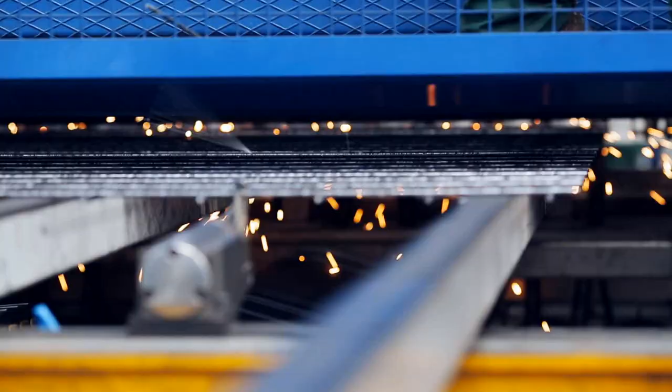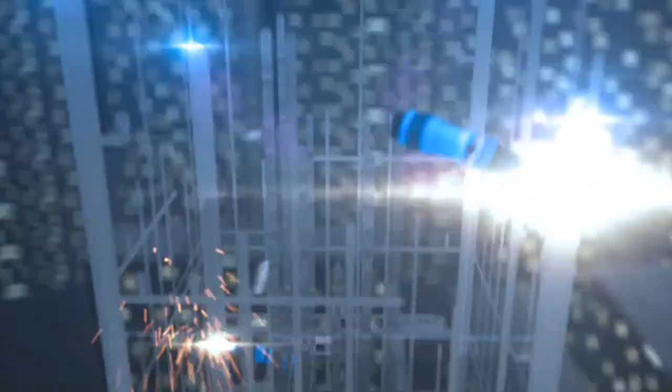A name engraved with the style and features of the era, an entity experiencing furious business battles, an enterprise bearing the mission of steel mesh industrialization. Jiaoyang Welder, in this ever-changing battlefield, gets stronger and stronger. Despite frustrations in the way ahead, it is stepping forward all the way.

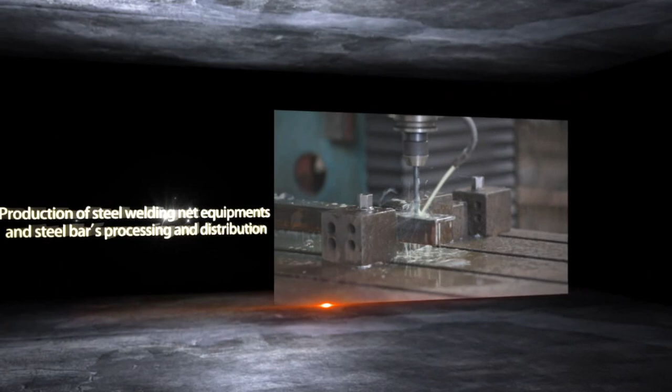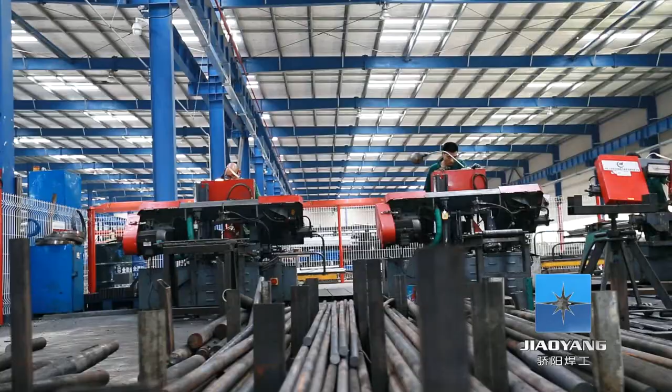Jiaoyang, located in the civilized wire mesh hometown Anping, China, was established in 1988. Devoted to wire mesh welding equipment manufacturing and steel processing and distribution. Under the strategic planning of based on the mesh capital, serve the world, the company carried out a modernized management system combined with industrialization, informatization, standardization, and branding.

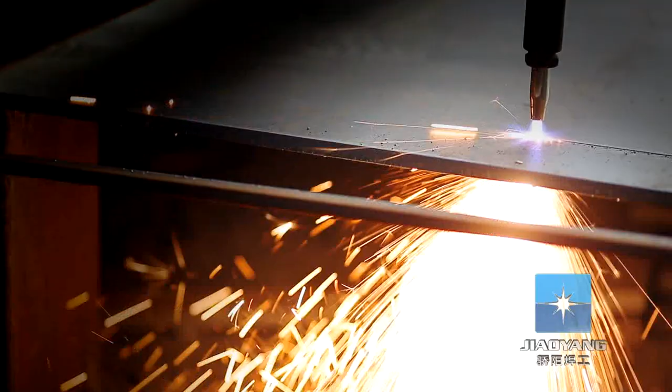Jiaoyang became a high-tech enterprise combining research and development, manufacturing, sales, and service. Jiaoyang has developed into a professional leader in the field of research and development of wire mesh resistance welding equipment.

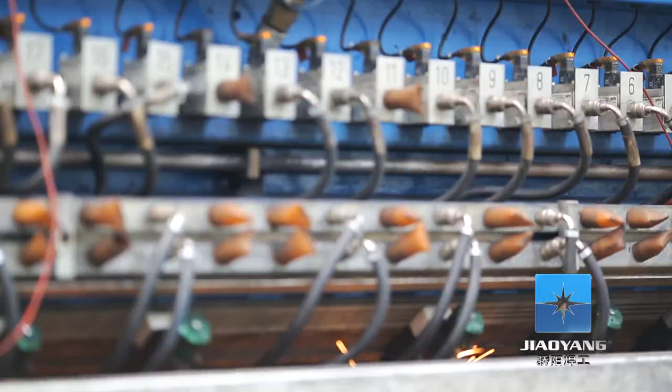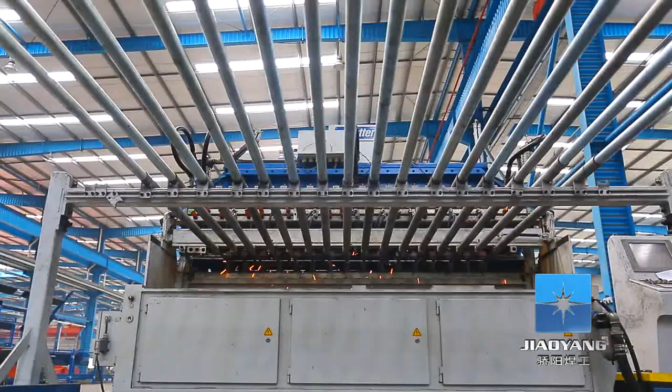Welded steel mesh is a new product replacing the traditional manual binding reinforcement products. It's classified as a key promotional application product by the National Ministry of Construction and also issued as a national key encouraging development product by the State Economic and Trade Commission.

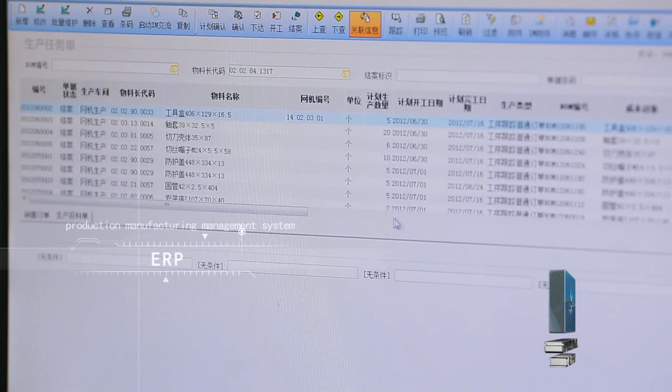Jiaoyang Welding Technology Center applies advanced production process and manufacturing techniques, CAXA PLM industrial design software, and an ERP production manufacturing management system, with a strong research and development and production team with independent development ability of intelligent products.

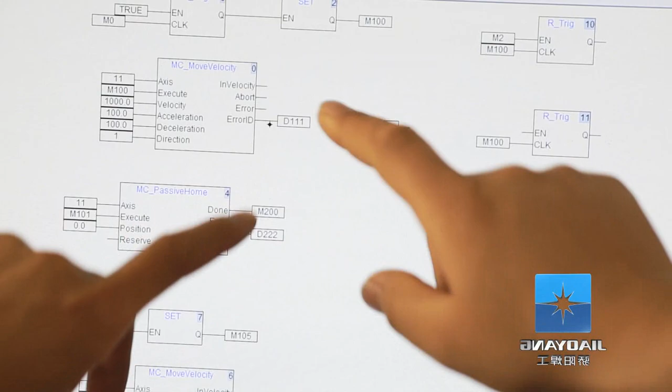The wire mesh welding equipment manufactured by Jiaoyang fully meets the requirement of high standard application of steel welding mesh in highways, water conservancy projects, bridge constructions, airport construction, livestock farming, and various other fields, laying a good foundation for the company to always stay at an international advanced level in the industry.

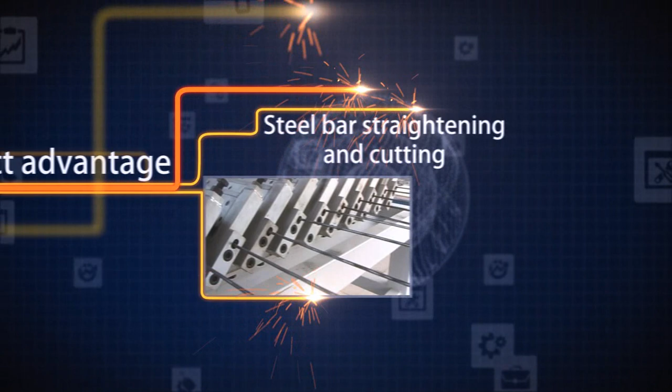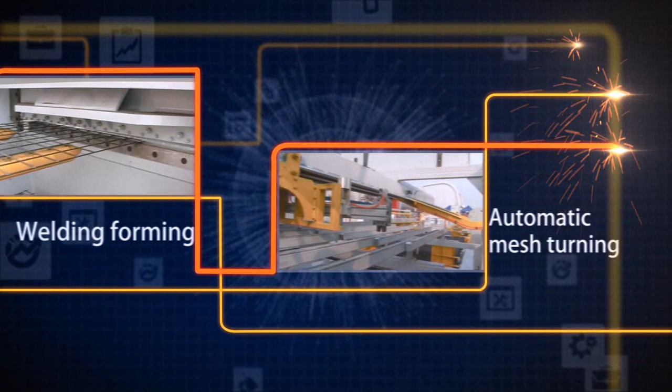Quality comes from strength, and technology creates brilliance. In order to meet various needs of customers, the company's products realize intelligent production in a range of processes, including steel bar straightening and cutting, automatic horizontal wire and vertical wire feeding, welding forming, automatic mesh turning, automatic mesh stacking, automatic mesh strapping, and automatic outputting.

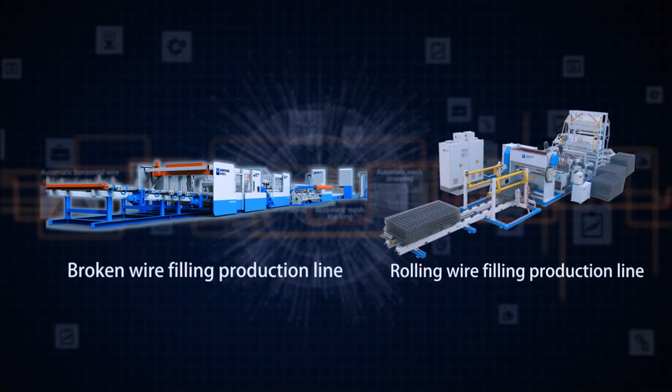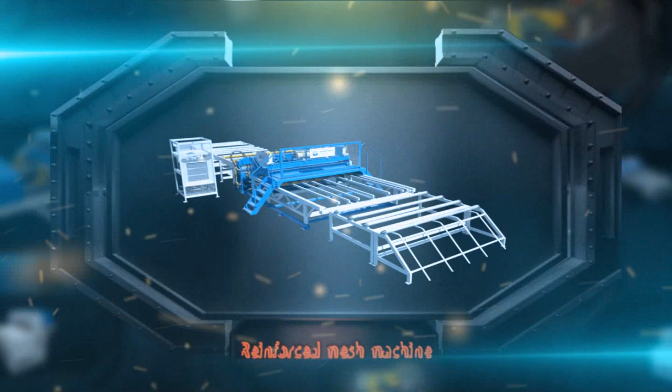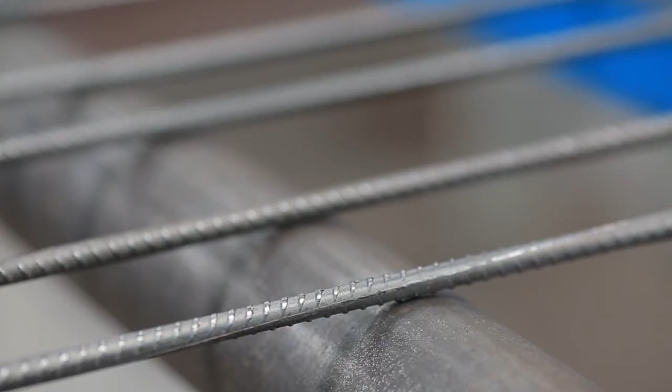Now, the company supplies automatic feeding production lines for both pre-cut wire and coil wire. And depending on the different characteristics of different industries, the company also supplies a series of economical machines. Reinforcing mesh welding machines: line wires are fed manually or automatically. The cross wires are stored with warehousing and automatic feeding. Workable wire diameter is 3 to 12 millimeters. Welding speed is 60 to 120 times per minute.

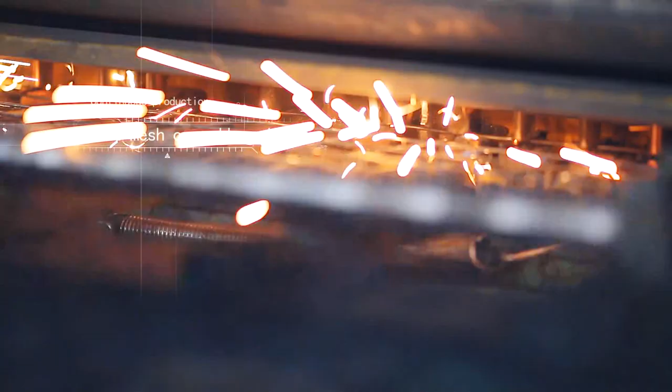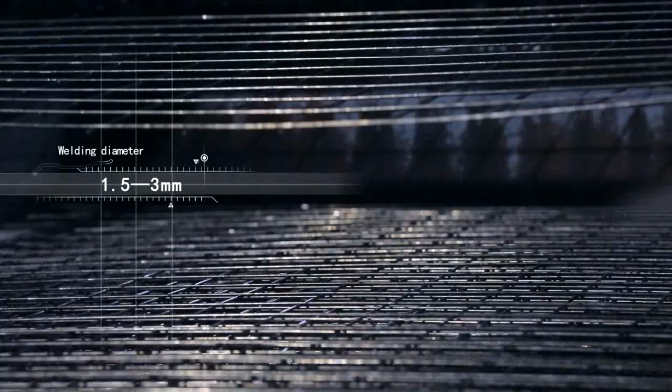Features of welded wire mesh machine: both the wires in vertical direction and horizontal direction are fed from coil wire. It can weld mesh panel or mesh coil continuously. Mechanical structure is compact, easy for operation and fully functional. Welding diameter is 1.5 to 3 millimeters. Welding speed is 40 to 80 times per minute.

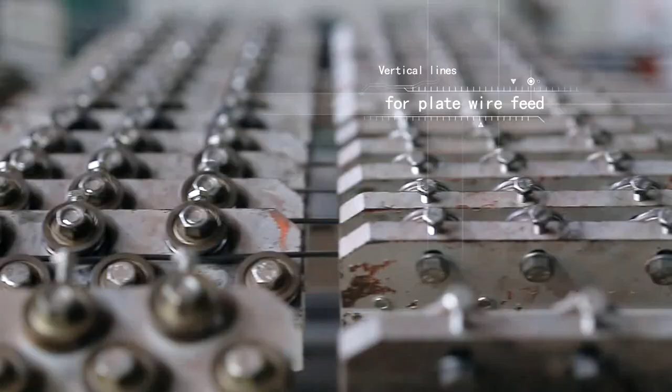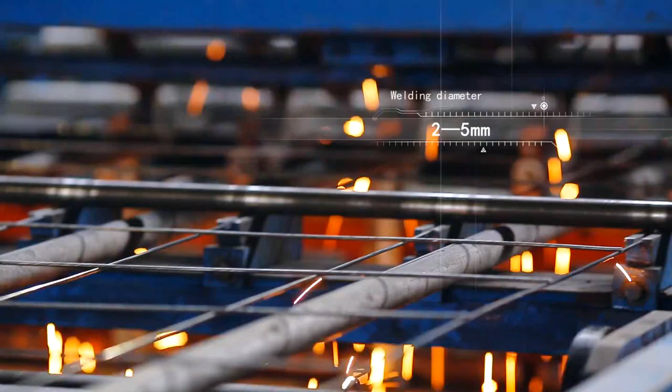Features of construction mesh welding machine: vertical wire is fed from coil. Horizontal wires are pre-cut and fed automatically. It can weld a mesh panel or mesh coil continuously. Welding diameter is 2 to 5 millimeters. Welding speed is 40 to 60 times per minute.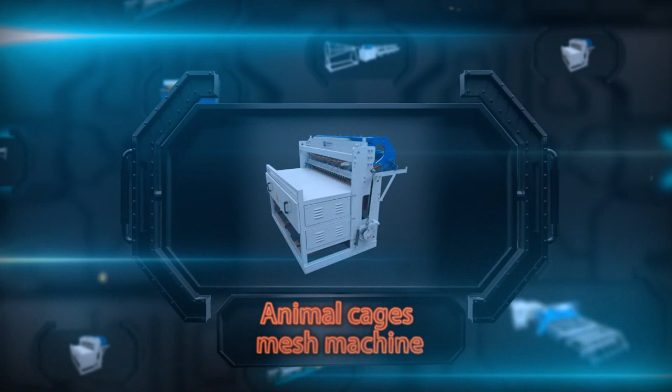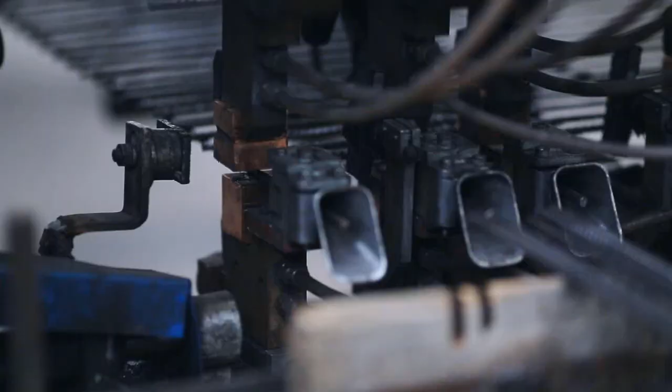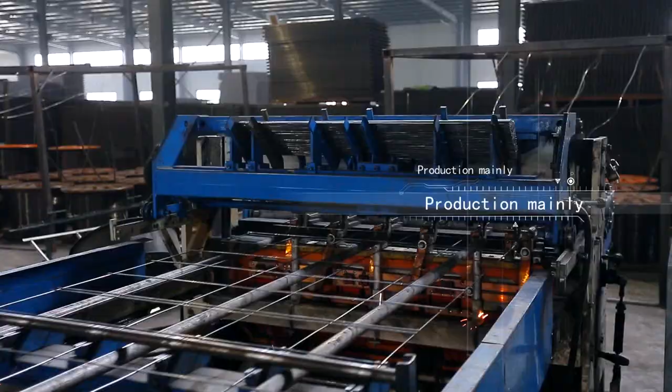Poultry cage mesh welding machine includes two models: mechanical poultry mesh model and numerical control poultry mesh model. Vertical wire is fed from coil, horizontal wires are pre-cut and fed automatically. It can weld a mesh panel or mesh coil continuously. Welding wire diameter is 2 to 3.5 millimeters, mainly used for producing poultry cage mesh.

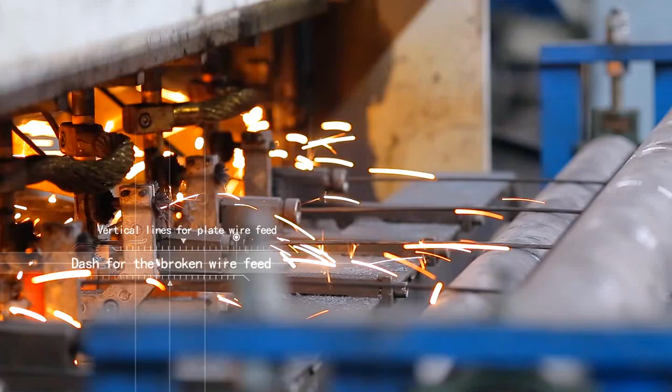Brick-force mesh welding machine features: line wires are fed from coil wire, cross wires are pre-cut and fed automatically. Equipped with automatic wire cutting device and mesh rolling device, it can weld 4 pieces of mesh coil at the same time, mainly used to produce brick-force mesh for construction.

Storage shelf mesh welding machine features: line wires are pre-cut wires and the rod is welded on a strip sheet, with automatic mesh falling device, mainly used in the production of storage shelves.

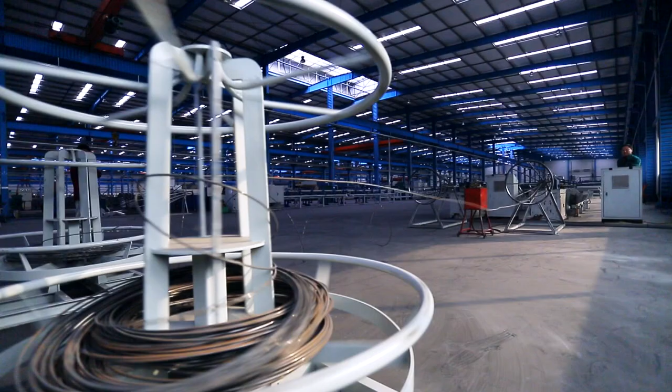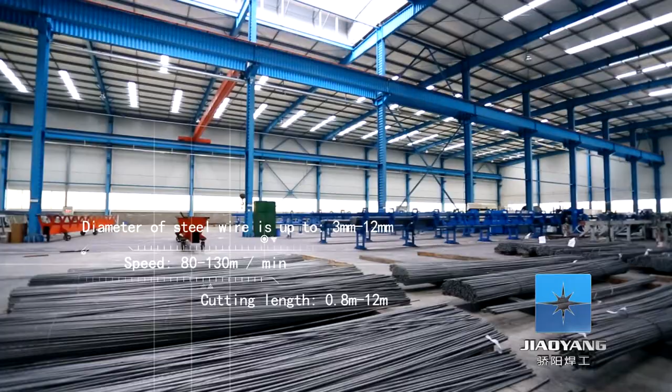In addition, the company also developed wire straightening and cutting machine, mesh rolling machine, and mesh cutting machine, providing a more convenient configuration for a series of mesh welding machines. Among them, the wire straightening and cutting machine can handle bars with diameter of 3 to 12 millimeters, cutting speed 80 to 130 meters per minute, cutting length 0.8 to 12 meters, providing our customers with powerful device support for production of high-quality steel mesh.

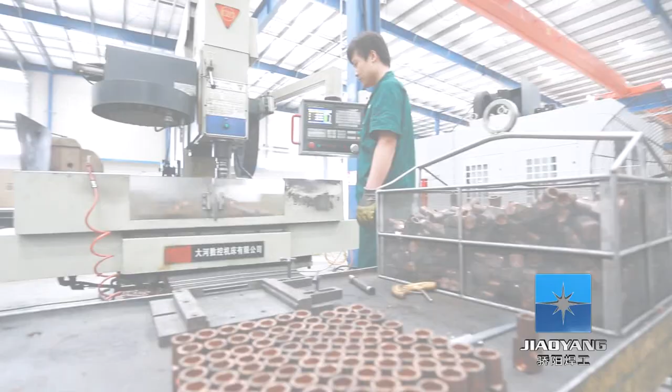This is a period full of opportunities and challenges. Seizing the opportunities and meeting the challenges is a social responsibility of every enterprise. According to statistics in June 2014, the company has 243 employees with 34 professional technicians, 103 units of processing machines, milling machines, planing machines, grinding machines, laser machines, machining centers, and other production equipment.

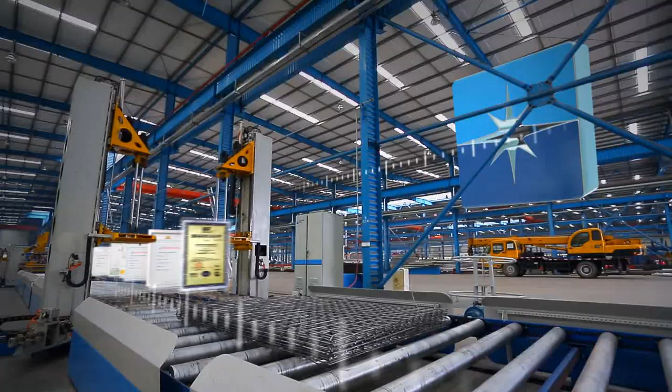The wire mesh welding machines researched and developed by Jiaoyang have got 32 patents. The machines have been sold to over 128 cities in 29 provinces, and also have been exported to 63 countries and regions all over the world. The company has already produced more than 3,400 sets of welding equipment. With customer support at home and abroad, and with our own efforts, Jiaoyang is making vigorous progress in continuous strides and striving on a characterized way of struggle and development.